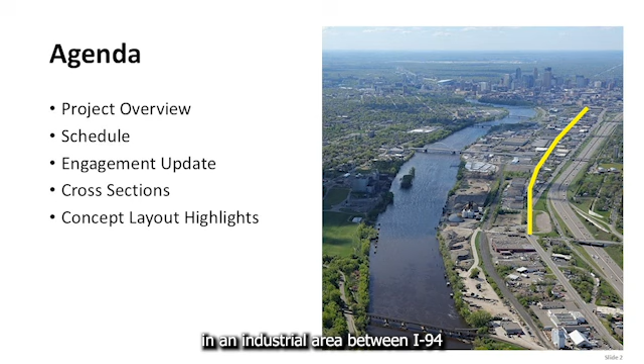On the right side of the screen, you can see an aerial image of the North 2nd Street Bikeway project area, running from Dowling Avenue down to Plymouth Avenue in an industrial area between I-94 and the Mississippi River.

The project proposes to construct a 2.2-mile street retrofit with a two-way curb-protected bikeway, traffic safety improvements, and Americans with Disabilities Act compliant pedestrian curb ramps along the full corridor.

At the Lowry, Broadway, and Plymouth intersections, the traffic signals will be updated and protected intersection designs will be constructed for both bikes and pedestrians, and accessible pedestrian signals will be constructed for pedestrians.

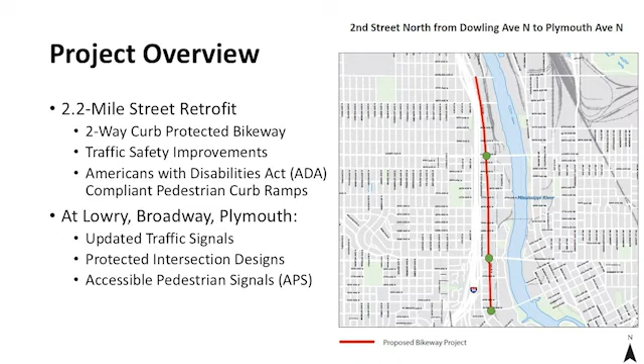Project schedule: the project started public engagement in 2024 with an initial needs assessment. Then two layout options were presented in the spring of 2025 for public feedback. Now in the fall of 2025, we are sharing this recommended concept layout that will go into final design. Next year, the project will go out for bid and construction will commence in 2027.

During engagement in the spring of 2025, we held a virtual open house, provided an online comment map on the concept layout options, did door knocking along the alignment, and met with property and business owners. We also presented to the neighborhood associations on the north side, including the NRRC, Hawthorne, and McKinley neighborhoods.

What we heard: intersection safety was a top priority for the community. The signalized intersections currently provide an unsafe crossing for both bikes and pedestrians. There's support for closing the sidewalk gaps along the alignment.

There were also concerns about bicycle and pedestrian conflicts in shared use paths, and there was support for greening and trees along the alignment. There was a desire to improve the pavement condition for bikes and to remove the debris that can often be found along this industrial corridor.

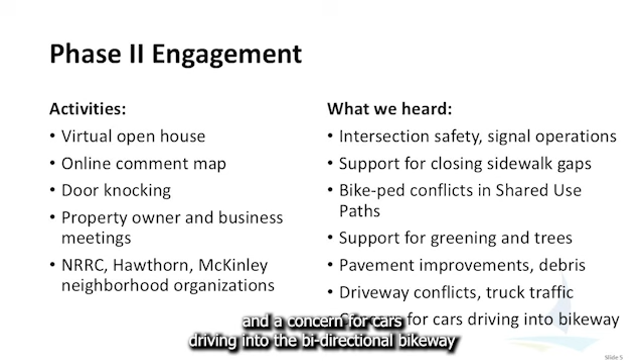One concern included driveway conflicts from the heavy truck traffic along the alignment, and a concern for cars driving into the bidirectional bikeway as proposed.

On Wednesday, September 10th, we will be hosting a Northside Community Bike Ride, which will depart from Webber Park at 5 p.m. This is a 7-mile loop, and it will be a no-drop ride, and we will be exploring bike infrastructure, treatments, and facilities in North Minneapolis. We hope that you can join us for this event.

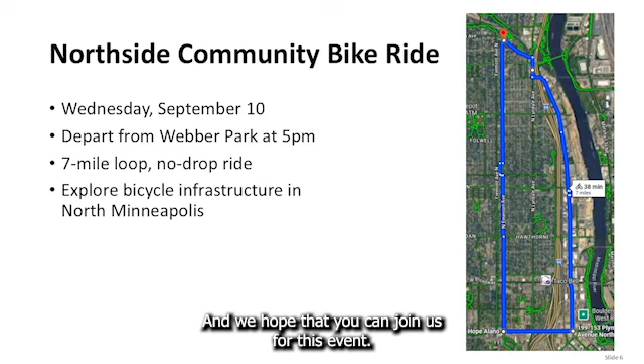The recommended concept layout consists of cross-sections on the northern half and the southern half of the alignment. Currently, in the northern half of the alignment, north of 26th Avenue, there's parking on one side of the street and painted bike lanes and two travel lanes.

In the proposed configuration, we maintain the existing parking lane on the west side, provide two travel lanes, but we're shifting all the bike facilities to the east side of the street with a concrete buffer offered as protection, similar to the picture in the bottom right.

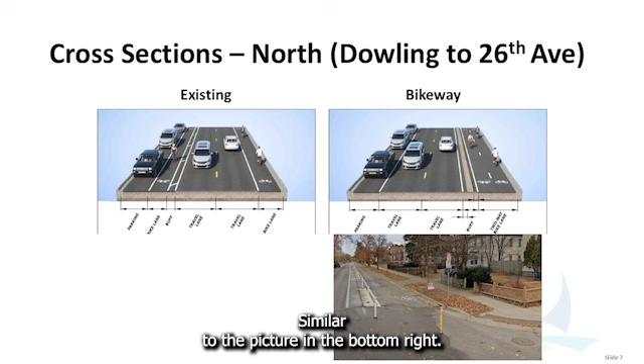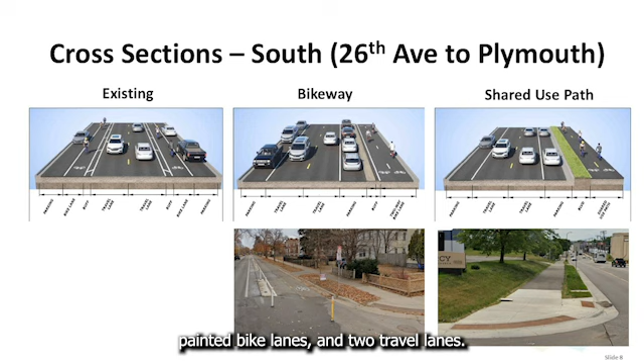On the southern half of the alignment, south of 26th Avenue, currently there exists two parking lanes, painted bike lanes, and two travel lanes. In the proposed configuration, we maintain parking in both directions, travel lanes, and provide a concrete buffer to protect a two-way bikeway along the east side of the street.

We're also proposing a shared use path between 24th Avenue and 26th Avenue to close a sidewalk gap, similar to the picture in the bottom right.

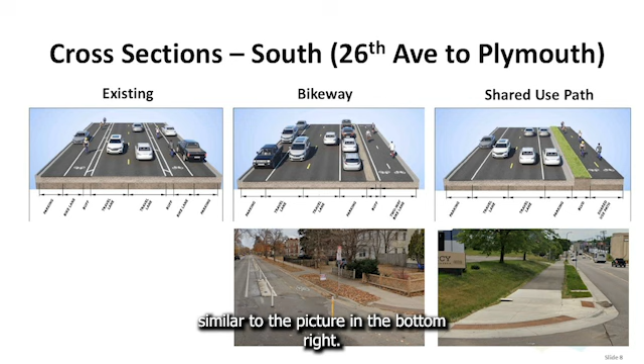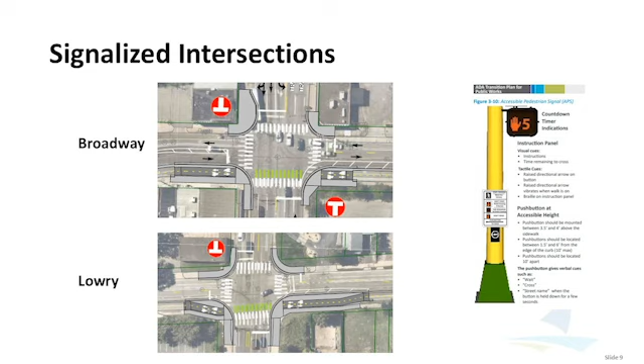We narrow the bikeway at intersections to provide a visual cue to drivers not to drive into the protected bikeway, as well as a floating mountable island near intersections that will prevent cars from driving into the bikeway, and a few intersections where we bring the bikeway up to sidewalk level to create a shared mixing zone.

Due to the low pedestrian volumes along this corridor, Public Works has found it appropriate to recommend a shared use path and to provide these mixing zones for short segments.

Green space opportunities will also be added to the corridor, especially south of 26th Avenue. The project will also pursue leading pedestrian intervals that provide a few-second head start to pedestrians crossing signalized intersections.

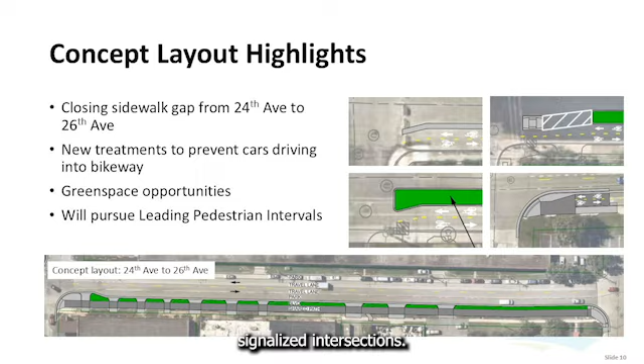To view the full recommended concept layout, please visit our project webpage, and if you have any additional questions, please contact me, Menno Schuking, Transportation Planner with Minneapolis Public Works. Thank you.